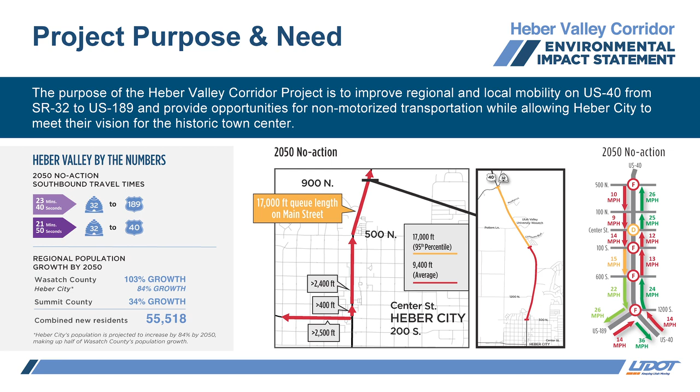The study's purpose has 4 key parts: regional mobility, local mobility, non-motorized transportation, and Heber City's vision for the historic town center. Every 4 years, the Regional Travel Demand Model is updated by the Rural Planning Organization, in this area, the Mountainland Association of Governments, or MAG, with the latest approved growth projections and planned transportation improvements.

A travel demand model is a computer model that predicts the number of transportation trips in an area at a given time. This prediction is based on the area's expected population, employment, household, land use, and road network conditions, which are based on development and growth patterns that are approved by the local governments. Usually, new models validate assumptions and results from previous models, so UDOT can rely on decisions based on previous models to keep moving forward.

In October 2023, we had a draft EIS almost ready to publish when MAG's Wasatch Summit Travel Demand Model was updated. The old Wasatch Summit model did not include all approved developments east of North US 40 or in the Mayflower area. Additional growth assumed in the new model resulted in 30% more traffic on North US 40 and 10% more traffic on Main Street in downtown Heber City compared to the previous model.

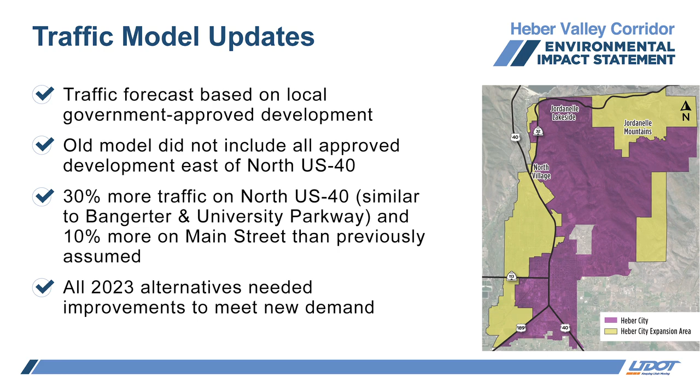This change in projected 2050 traffic delayed the EIS process while the new travel demand model was calibrated and finalized, and the implications to 2023 alternatives we previously had developed and screened were analyzed. We took our time and carefully analyzed the new data to assure our proposed improvements met the current and future travel needs of the community.

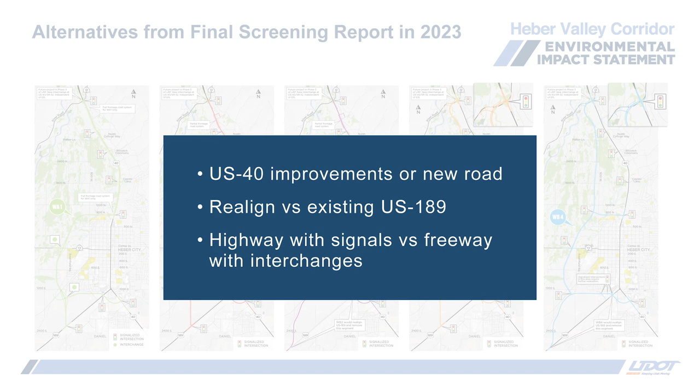Back in 2023, we had 5 action alternatives that were being evaluated in detail, shown here. All 5 were west alternatives, and the main difference between them was whether the northern portion included improvements on existing US 40 or a new road all the way to SR 32, whether or not US 189 was realigned on the south end, and whether it was a freeway with interchanges, meaning intersections would cross over or under each other with bridges or ramps, or a highway with signalized intersections.

Previously, we did have one freeway facility with grade-separated interchanges, which was WA1. The other 4 were at-grade highway facilities with signalized intersections. Based on the updated traffic model I mentioned earlier, the 5 alternatives designed in 2023 were not sufficient to accommodate the larger projected traffic volumes and needed additional capacity improvements.

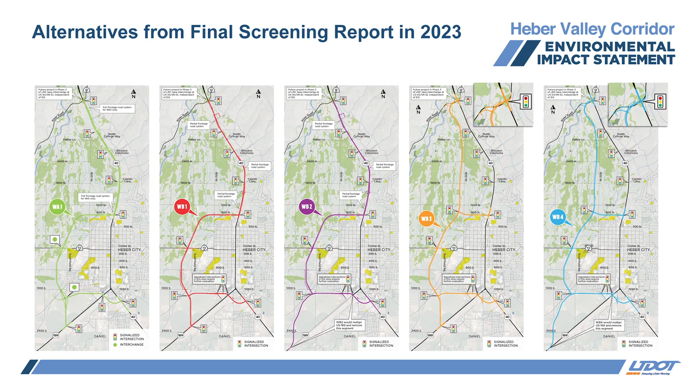WA1 was already a grade-separated option that proposed a new freeway along the west corridor, linking it up with the existing US 40 to the north. It was designed for smoother traffic flow by removing at-grade crossings on the new corridor itself. However, US 40 and US 189 would still have signalized intersections. And to make it work, we needed a key east-west connection at 1300 South to tie everything together, which is needed for all the alternatives.

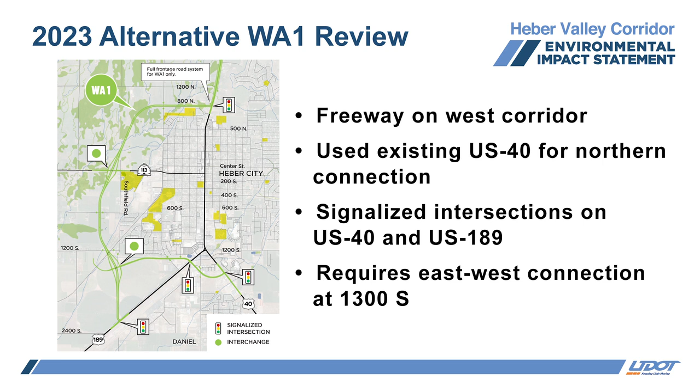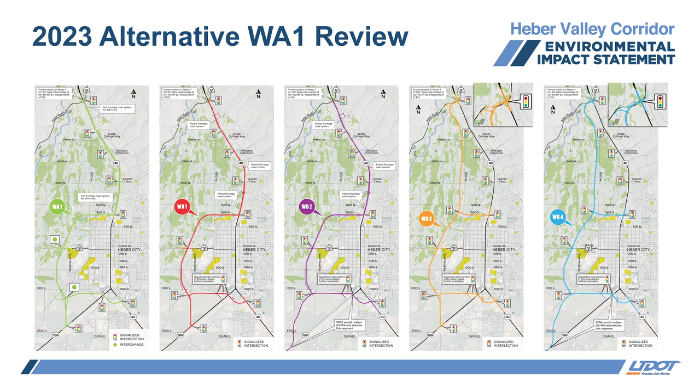The updated traffic model projects that by 2050, the highest volumes will be on US 40, north of downtown Heber City. We expect nearly 50,000 vehicles per day, similar to Bangerter Highway today. With these volumes, we needed to make adjustments to WA1 and the WB alternatives to meet the travel demand. The new 2050 traffic volumes are large enough to consider grade separation for all our options.

Because vehicles would not need to stop with grade separation, we refer to these as free-flow alternatives. We created a free-flow variation for the 4 at-grade alternatives, which are WB1, WB2, WB3, and WB4. The free-flow variations remove at-grade signals, convert intersections to interchanges, and add directional ramps to connect the new corridor to existing roads, such as US 40 and US 189.

Access would only be allowed at interchanges or directional ramps. The 2023 WA1 alternative already featured many similar elements as the WB1 free flow alternative and was considered redundant, so we improved it to become Alternative WB1 Free Flow.

So we had 4 at-grade alternatives and 4 free flow counterparts for a total of 8 alternatives we took through the screening process. The at-grade alternatives for WB1 and WB3 have been updated to improve traffic flow on US 40 north of Heber City. To achieve this, we've added capacity by either widening US 40, adding turn lanes, or a mix of both, depending on the specific alternative.

The main difference between these 2 alternatives is that WB1, shown on the left, includes improvements on existing US 40, and WB3, shown on the right, includes a new road all the way to SR 32. Both of these alternatives include signalized intersections on North US 40 at SR 32, University Avenue, Commons Boulevard, Coyote Canyon Parkway, and 900 North.

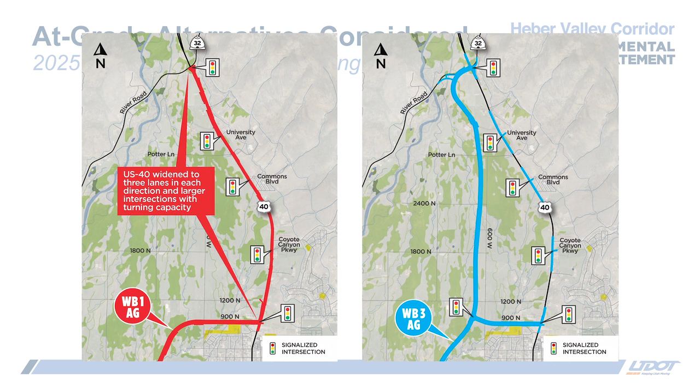These are similar to the alternatives that were considered in 2023, except for WB1, North US 40 would be widened to 3 lanes in each direction, with a raised median and added turn lanes at signalized intersections. For WB3, North US 40 would not need to be widened since there would be a new parallel road. Existing US 40 would still have a raised median and added turn lanes at signalized intersections. Both would connect to US 189 at Southfield Road, and there would be no changes to US 189.

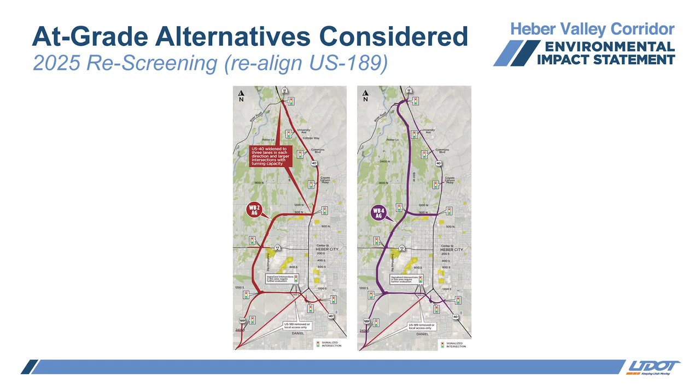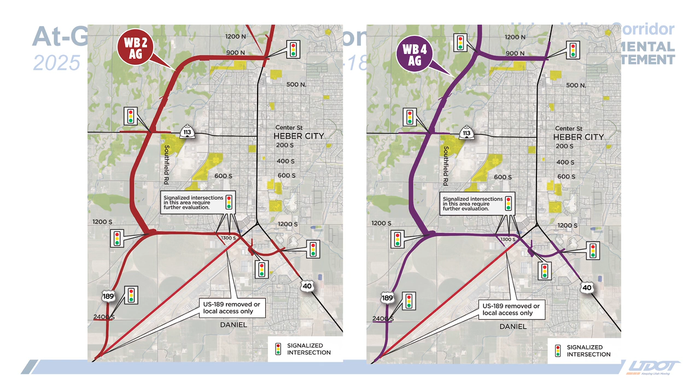We have 2 other at-grade options, WB2 and WB4, that are the same as what we just reviewed with WB1 and WB3, but with a variation on the south end at the US 189 connection. Instead of using US 189 on its current alignment, it would instead be rerouted to run along the west edge of the sewer farm and 1300 South. The existing road might remain in place, but it would not be designated as US 189, and most of the traffic would be directed onto the new western corridor.

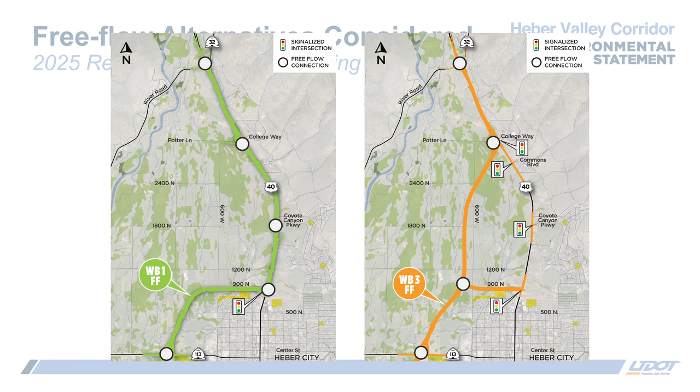The free flow alternatives generally follow the same alignment as the at-grade ones, with a couple of exceptions. The at-grade alternatives tie into US 40 at River Road, whereas the WB3 free flow alternatives tie in to US 40 near Potter Lane. In order to maintain connectivity with SR 32 and meet design standards, the WB3 free flow alternatives need to tie in to US 40 about 1 mile south of the interchange with SR 32, which puts it around Potter Lane.

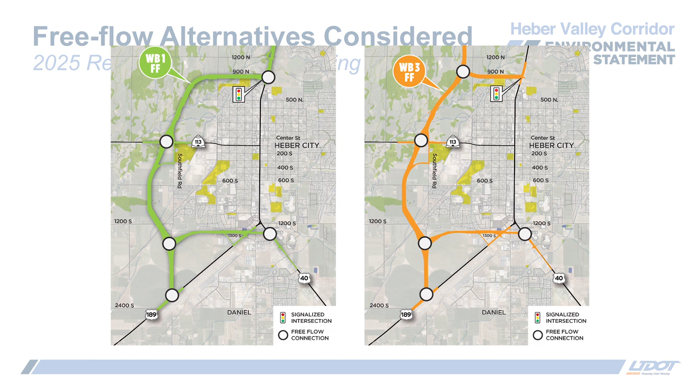The connection to US 40 south of the hub intersection is also different for all free flow alternatives compared to all the at-grade alternatives due to design speed, design standards, and intersection spacing requirements. The at-grade alternatives were designed for lower speeds, and the alignment was based on spacing needed for signalized intersections. The at-grade alternatives would transition between 1300 South and 1500 South. The free-flow alternatives are designed for higher speeds and require straighter alignments and don't need to meet signalized intersection spacing requirements. These free-flow alternatives would align more closely with 1300 South.

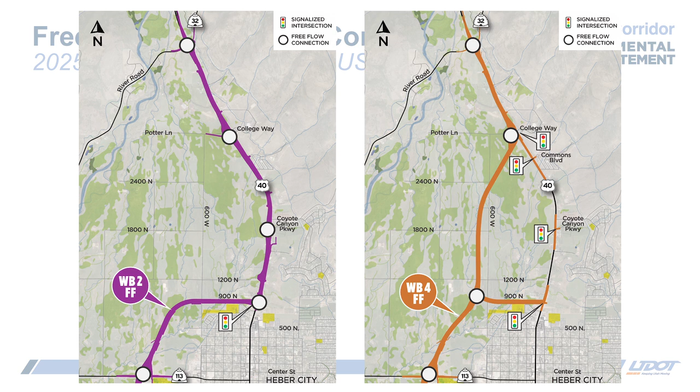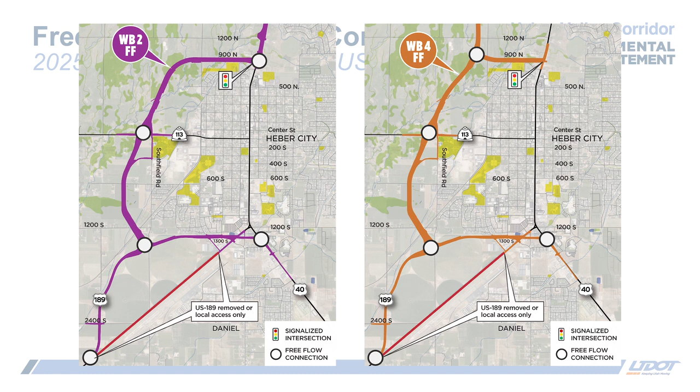This slide compares the free-flow options for WB2, shown on the left, and WB4, shown on the right. These alternatives are the same as what we discussed with the WB1 and WB3 free-flow options, except they would realign US 189 on the south end to follow the west side of the sewer farm and 1300 South. The existing road might remain in place, but it would not be designated as US 189, and most of the traffic would be directed onto the western corridor.

We used the same screening criteria that were used in 2023, but looked at some measures in greater detail. There are 3 steps where alternatives can be eliminated, which are preliminary evaluation, level 1 screening, and level 2 screening. In the preliminary evaluation, we determined if alternatives have fatal flaws and should be eliminated for reasons other than level 1 and level 2 criteria, which we'll discuss a little bit later.

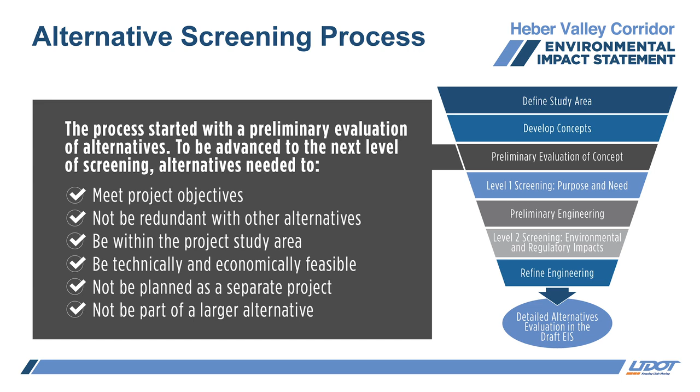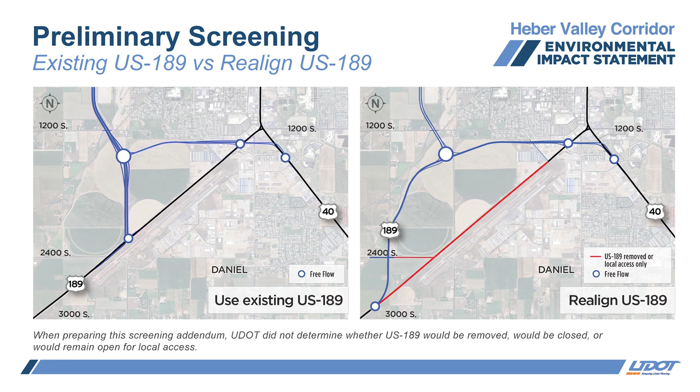The results show that realigning US 189 doesn't have a substantial benefit to regional travel times on the corridor or on Main Street, so we considered the alternatives that realign US 189 to be redundant with their counterparts that do not. In addition to providing no obvious traffic benefits, there would be negative effects from realigning US 189. Realignment would increase traffic on 1300 South, which abuts a residential neighborhood. For the at-grade alternatives, traffic volumes would increase from about 7,000 vehicles per day on 1300 South to almost 19,000 vehicles per day. We expect a similar increase for the free-flow alternatives if we realigned US 189.

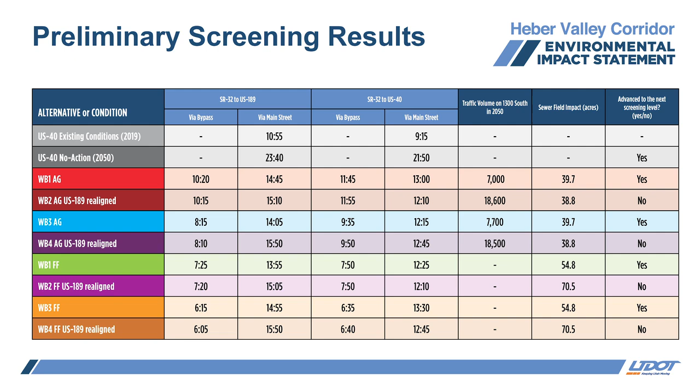Realigning US 189 would also result in similar or greater impacts to the sewer farm compared to using US 189. For the free-flow alternatives, there would be almost 16 additional acres impacted by realigning. To recap, we considered the alternatives that realign US 189 redundant with their counterparts that don't because they perform comparably with respect to traffic operations. There would be negative effects with realigning US 189, such as more traffic on 1300 South, greater right-of-way impacts, including 1 additional residential property acquisition, more sewer farm impacts, and a higher cost.

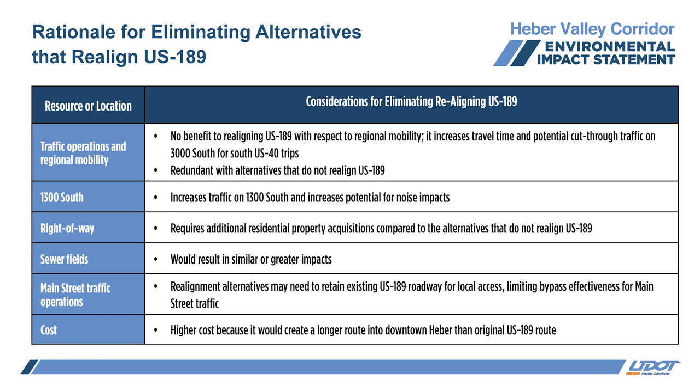To maintain local access, we potentially would need to keep the existing US 189 segment in addition to the realignment, and that would result in 2 roads to maintain. So, we eliminated the 4 alternatives that would realign US 189 during the preliminary evaluation because there were no compelling benefits that would warrant the extra impacts, effort, and cost. The 4 alternatives that use existing US 189 were carried forward to Level 1 screening.

Level 1 screening is used to evaluate how well alternatives meet the purpose and need, which is to improve regional and local mobility on US 40 from SR 32 to US 189, provide opportunities for non-motorized transportation, and allow Heber City to meet their vision for the historic town center. I'll discuss these criteria and the measures we're using in more detail, starting with mobility. Mobility is the ease and efficiency with which people and goods can move from one location to another.

Regional mobility is focused on through traffic, or traffic whose destination is not Main Street, from SR 32 to US 189 and South US 40. Measures for this criteria include travel time on the West Corridor and the number of conflict points. Conflict points are the number of intersections and driveways which impede mobility and decrease safety. Local mobility is focused on downtown Heber and Main Street, and our measurements are related to local traffic performance. Specifically, we're looking at PM peak hour operations on Heber City Main Street, which is typically between 5 and 6 p.m. Our measurements are level of service, or LOS, travel time on Main Street, and queue length.

Level of service describes how well traffic moves on a roadway or at an intersection and considers factors like speed, travel time, density, how close vehicles are to each other, and delay. Traffic queue length is a measurement of how far back a line of stopped vehicles extends from a specific point. We're looking at the southbound queue length at 500 North. All alternatives that pass Level 1 and 2 screening will be refined with additional engineering to include bicycle and pedestrian accommodations that are compatible with local planning documents.

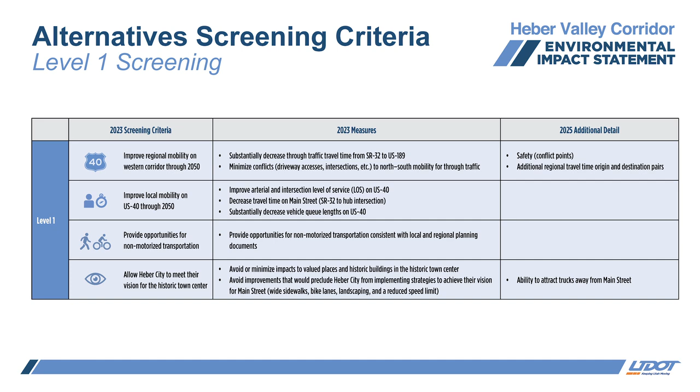The other measure we looked at for Level 1 was conflict points. After the last round of screening, MAG published a safety action plan and identified US 40 as part of the region's high injury network. Safety has always been incorporated into the alternative designs, but with the increased traffic and recent safety analysis, safety has been elevated as an important differentiator for screening. Conflict points were previously considered for regional mobility, but they are now considered as an important differentiator for safety as well.

Regional mobility is where we see more meaningful differences between the alternatives. If we look at WB1 at grade, for example, we see that southbound travel to US 189 would be about 3 minutes faster on the free flow alternatives, or about 33% faster than the at grade alternatives. Overall, the free flow alternatives are about 30 to 40% faster than their at grade counterparts in the southbound direction. In the northbound direction, the free flow alternatives are about 30 to 50% faster than their at grade counterparts. What these times show us is that free flow options are the best for regional mobility because they are substantially faster than the at grade alternatives.

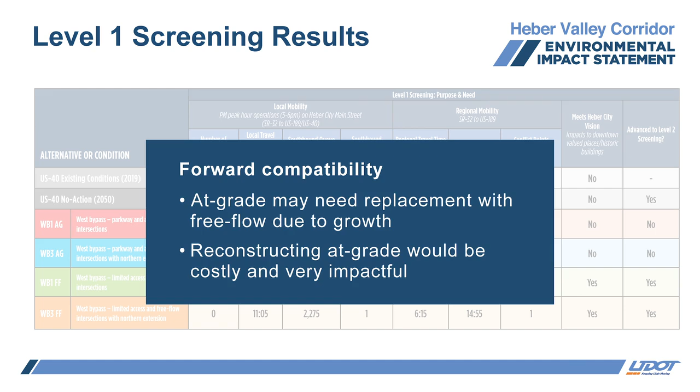The at grade alternatives would also not be as forward compatible as the free flow alternatives. What we mean by forward compatibility is that it is likely that the at grade alternatives would need to be replaced with free flow alternatives at some point in the future due to the continued population growth and development in the valley. Having to retrofit the at-grade improvements with grade-separated ones would result in additional costs and impacts to reconstruct. Taking all this into consideration, we eliminated the at-grade alternatives and advanced the two free-flow alternatives for WB1 and WB3 to Level 2 screening.

The purpose of Level 2 screening is to eliminate alternatives that perform similarly in meeting the purpose of the project compared to other alternatives, but would result in greater impacts to key resources. The key resources we evaluate at this level of screening include waters of the U.S., Section 4(f), property impacts, and cost. Waters of the U.S. and Section 4(f) resources are important for screening because of the federal laws that protect them. Waters of the U.S. include wetlands, creeks, streams, canals, ponds, and ditches. Section 4(f) resources include significant publicly owned parks and recreation areas, as well as historic sites eligible for listing on the National Register of Historic Places.

It is important to note that impact evaluation during Level 2 screening is different from the detailed evaluation that will come after the screening process is complete, which we'll discuss a little later. As with preliminary and Level 1 screening, we use the same criteria that were used in 2023, looking at some measures in greater detail.

Since the last round of screening, we have become increasingly aware that it will be expensive and difficult to mitigate impacts to the sewer farm. Right-of-way impacts to residents and businesses were previously considered in Level 2 screening, and for rescreening, impacts specifically to the sewer farm were considered as well. For rescreening, we are now considering archaeological sites as Section 4(f) resources. For this project, archaeological sites include historic canals, railroads, and ditches.

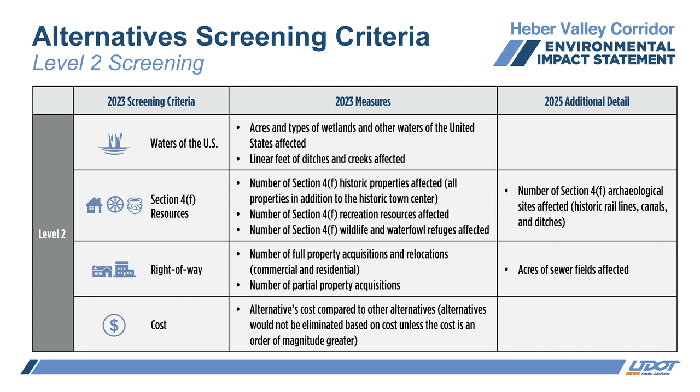This table shows the results of Level 2 screening, where we only evaluated two alternatives, the WB1 and WB3 free-flow options. WB1 would have fewer impacts to waters of the U.S., including canals, ditches, streams, and wetlands. WB3 would have fewer property impacts, including historic structures, but greater impacts to archaeological sites, specifically historic canals, ditches, and railroads. Neither free-flow alternative was eliminated as a result of Level 2 screening, since they both include impacts, just different kinds. Both will be carried forward for detailed evaluation in the Draft EIS.

There are trade-offs between the two free-flow alternatives that warrant additional review that will be conducted in the Draft EIS. This review will also provide more information for the public to consider during the Draft EIS public comment period. Moving forward in the EIS, these alternative names will be simplified. Because only two Western alternatives will be advanced, the names no longer need to be described by location. Alternative WB1 free flow on US 40 will be called Alternative A. Alternative WB3 free flow with a northern extension will be called Alternative B.

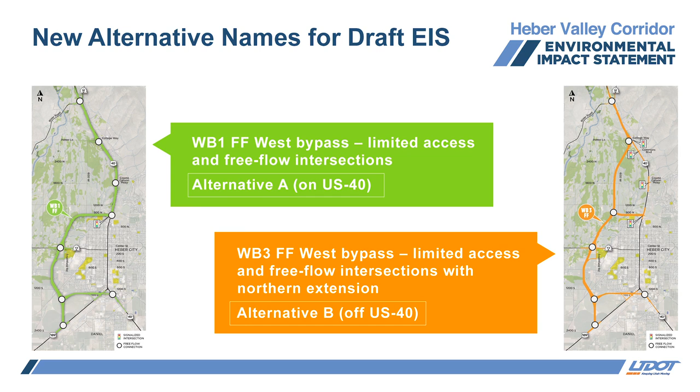We'll walk through the design of the three segments of both alternatives. Both alternatives include a multi-use trail, freeway-style interchanges, and while there will be local access over or under the route to and on existing roads, access to the corridor is only provided at interchanges and free-flow connections. Alternative A and B are largely the same everywhere, except between Potter Lane and 900 North. A is on US 40, and B is in the north fields between Potter Lane and 900 North.

The cross-section on US 40 is slightly wider than the cross-section on the Western Corridor because frontage roads are needed on US 40 for local access. The Western Corridor would be 250 feet wide, and US 40 would be about 250 feet to 325 feet wide, and both roads would be wider at the interchanges. The speed limit would be 65 miles per hour on the Western Corridor and 55 miles per hour on US 40. Alternative A uses US 40 for a longer distance, so the travel time is not as fast as Alternative B, which uses the Western Corridor for a longer distance.

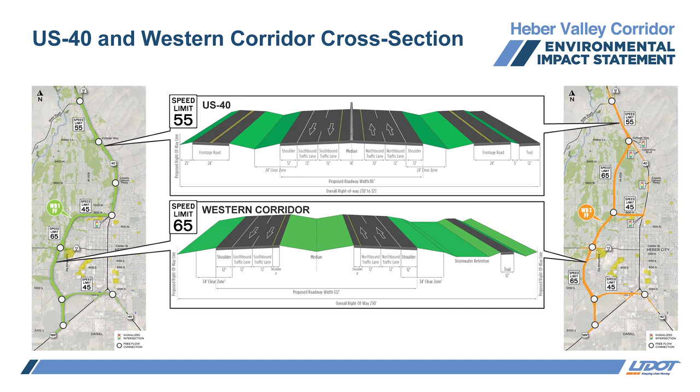The speed limit for east-west connections at 900 North and 1300 South is 45 miles per hour for both Alternative A and B. As we discussed earlier, 1300 South is a critical connection to the West Corridor and is included in both alternatives. The cross-section at 1300 South would be 160 feet to 185 feet wide. The inside lanes are the Western Corridor through lanes, and those would be elevated with bridges over Daniels Road, US 189, and 300 West. The inside lanes would be elevated between US 40 and Industrial Parkway. The outside lanes would be one-way frontage roads between US 189 and the sewer fields to provide access to local roads including US 189, 300 West, and a right-in, right-out at Industrial Parkway.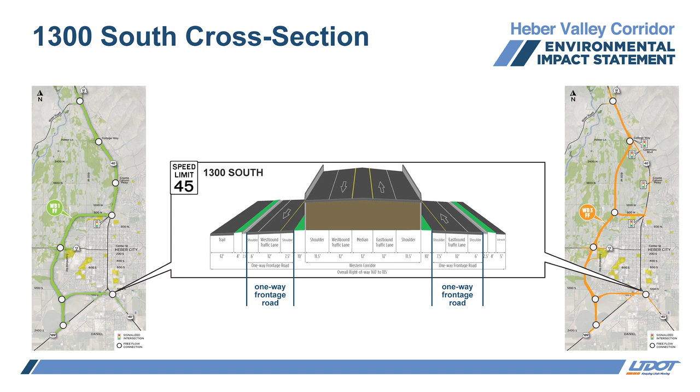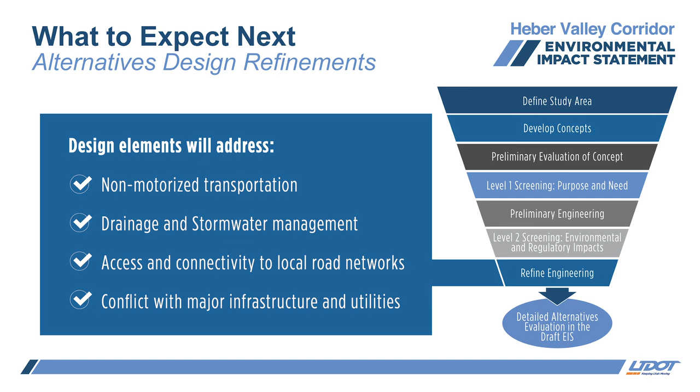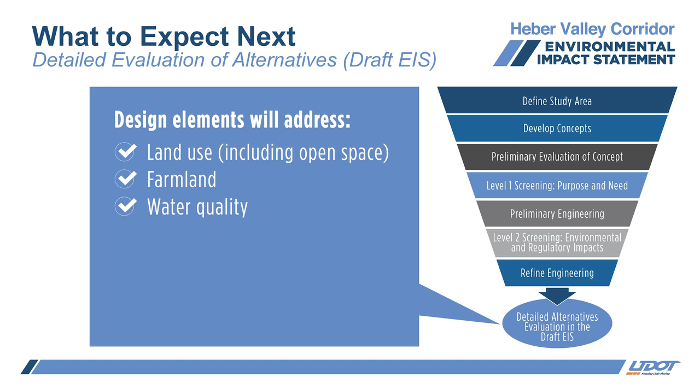Moving forward, we will refine the design of both alternatives and then perform additional analysis. Design refinements are to address access, drainage, and stormwater management and avoid impacts to key resources where possible to support detailed analysis in the Draft EIS. In addition to design refinements, we will be looking at potential impacts in much greater detail than we do in the screening process. Our detailed analysis will be evaluating the potential impacts to nearly 20 resources that include what you see on screen and several more, including economics, property, traffic and transportation, considerations related to pedestrians and bicyclists, air quality, noise, water resources, ecosystem resources, floodplains, cultural resources, hazardous materials and waste sites, visual resources, and open space.

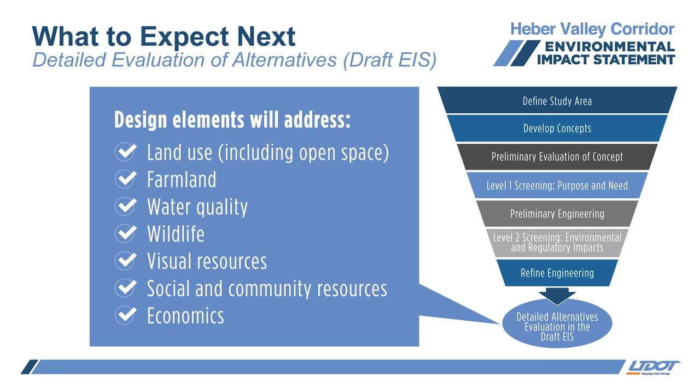To wrap up, I'd like to walk through our schedule. Currently, we completed screening and are working on the design refinement and detailed impact analysis that Naomi just described. Once this analysis is complete, we will identify the preferred alternative and publish the Draft EIS, which we expect to be sometime this fall. When we publish the Draft EIS, we'll be holding public hearings and a comment period to get input from the community on our analysis and the study recommendations.